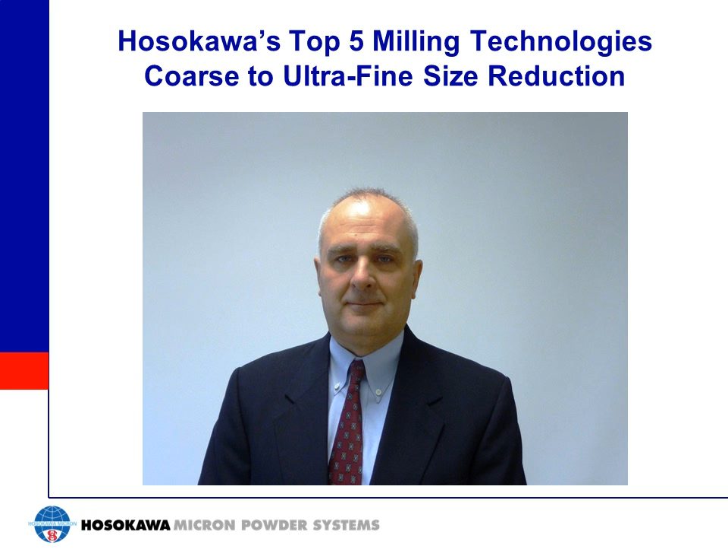The most important aspect of selecting a size reduction technology is to know some basic information about the product you want to process. It's important to note that based on product characteristics, only certain milling technologies may be suitable for a given application. Starting a project understanding these basic requirements will result in an economical and trouble-free milling system solution.

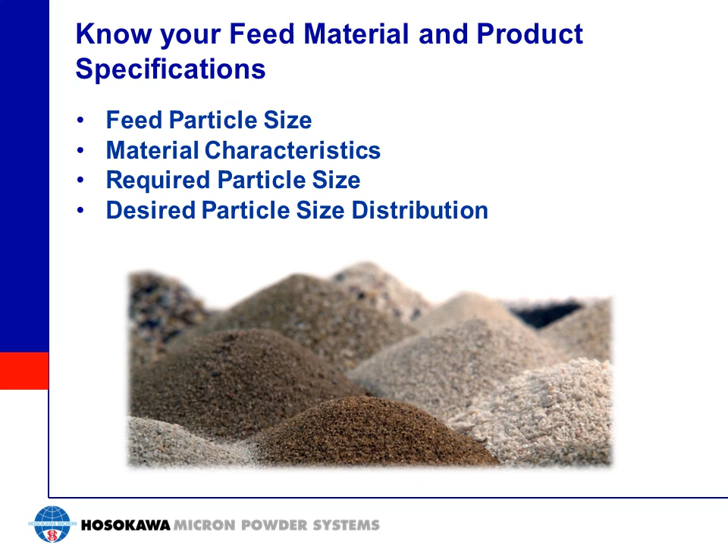Let's look at the effect of feed size on mill performance. Larger feed material means more residence time in the mill, and larger equipment will be required for a given production capacity. Feed size affects feeding methods and feeder selection. For example, air conveying a large high bulk density feed to a mill may not be possible.

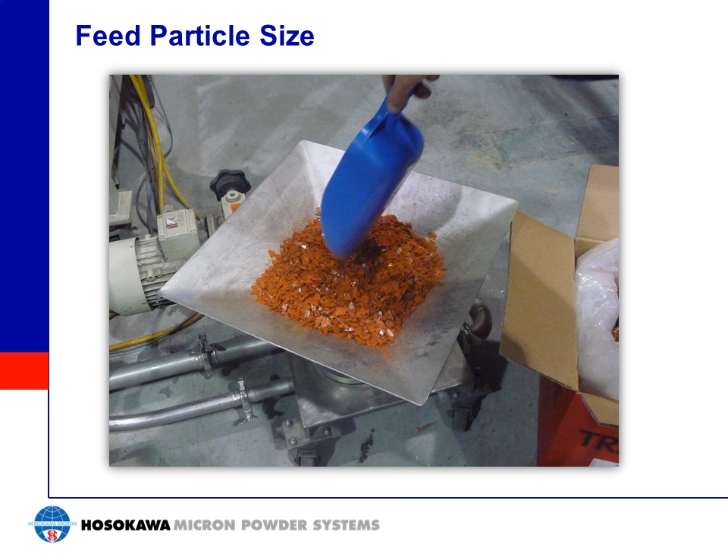Knowing the characteristics of your feed material is important. Bulk density affects flowability of the product. Feed rate and accuracy can be affected. Light density materials may flood past the feeder, affecting feeding accuracy and mill performance. Bulk density will also affect the sizing of hoppers and finished packaging. Light bulk density material will affect grinding efficiency, as lighter materials are more difficult to keep in the grinding zone of the mill.

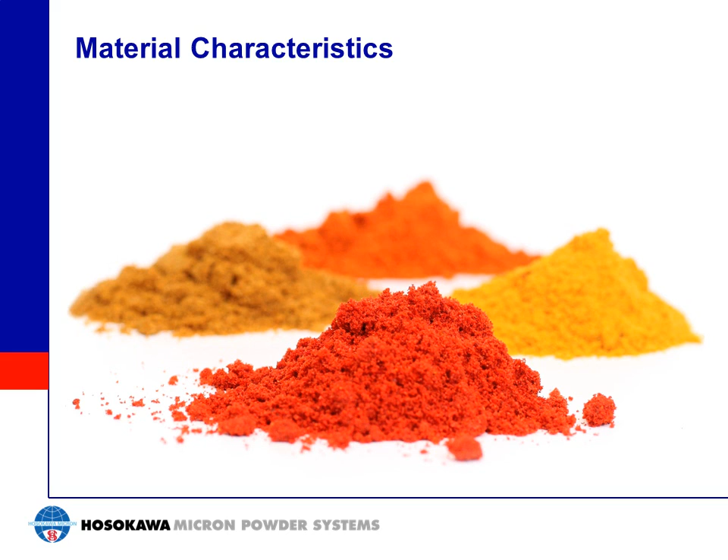Cohesive and sticky products may build up on mill internals and upset airflow and increase pressure drop across the mill. Systems may require the use of high velocity air to keep mill internals clean. Conditioned air for temperature and humidity control may also be required.

Low melt point materials are sensitive to high energy input. Heat-sensitive products may require cooling in order to efficiently process them. Hygroscopic materials absorb moisture, causing buildup and plugging, and may require dehumidified air for processing. On the other hand, products containing moisture may allow for high energy processing. The moisture in the product will absorb the heat of grinding, providing cooling in the process.

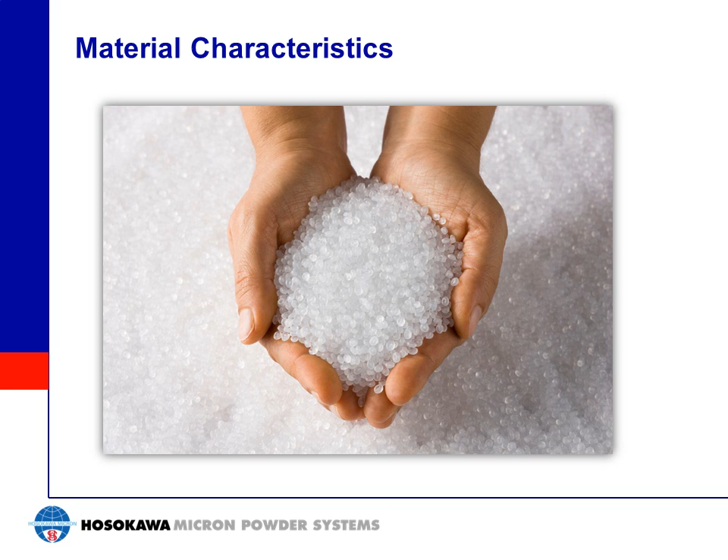High energy input can lead to the generation of too many fines when processing friable materials. Low energy processing may have to be employed when handling these types of materials. Impact force tends to produce sharp angular particles. Compression and shear forces tend to produce more rounded particles. High aspect ratio materials are destroyed by certain size reduction techniques. You can see that material characteristics play a very large role in machine selection and design.

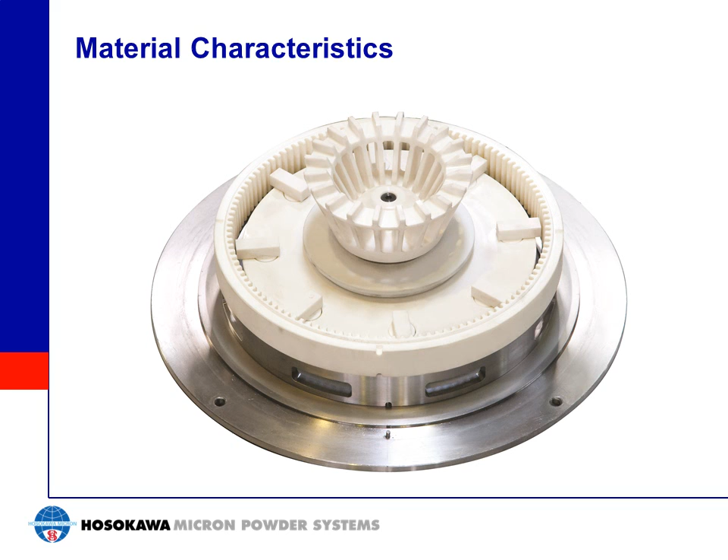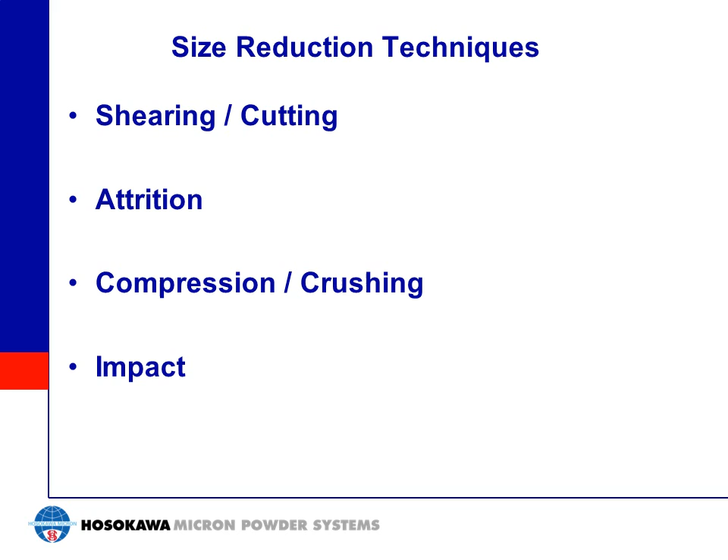There are 4 basic techniques utilized in size reduction equipment for the purpose of dry particle size reduction. They include particle size reduction through the processes of shearing, attrition, compression, and impact. In some cases, a combination of these may be found in any one mill type.

Milling using shear forces works when particles are stressed between 2 surfaces that are moving in opposite directions. An example would be the operation of a ball mill, where particles experience shear forces as they are stressed between the media, which is constantly in motion within the mill.

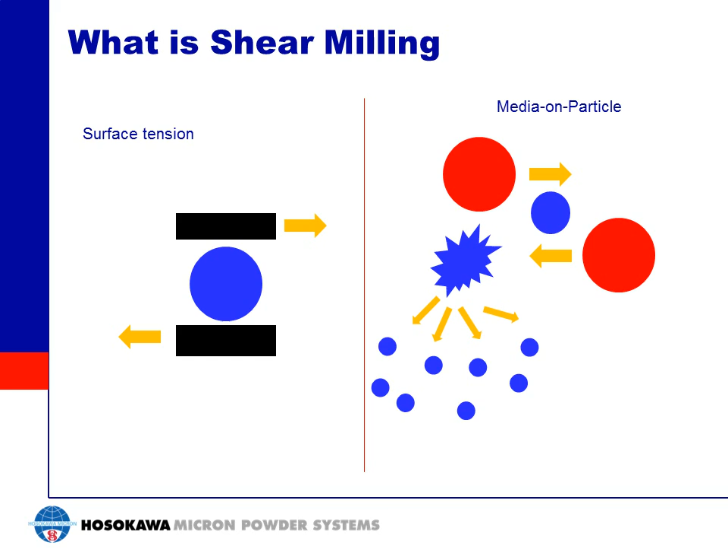Compression milling can be accomplished in 2 ways. The first would be the compression of a particle between 2 solid surfaces. An example would be the size reduction that takes place in roller mills. The second way would be the compression of a particle between grinding media, such as the way a horizontal ball mill functions. The principle of compression and shear forces is employed in many types of size reduction equipment. These principles are best used to produce materials with narrow particle size distributions with a limited generation of fine particles.

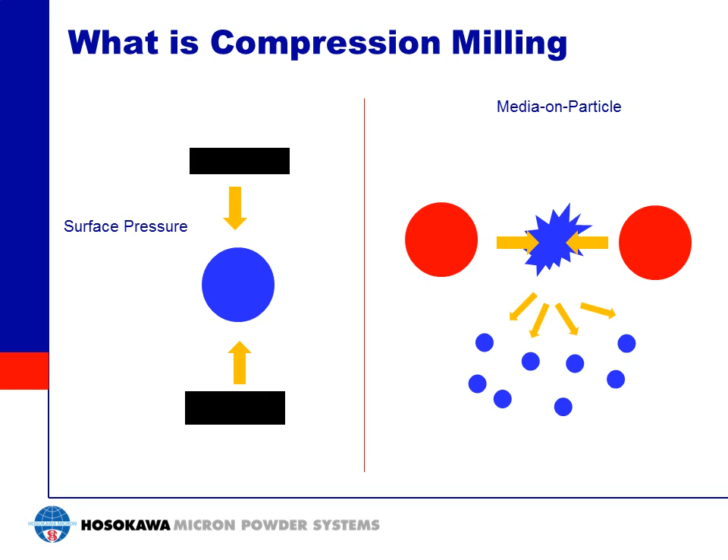Impact is defined as a solid object moving at high velocity coming into contact with a stationary particle.

Impact milling can be accomplished in two ways. The first is to use a moving hammer or impact element to strike and fracture a particle into smaller pieces, as shown on the left side of this slide. As an example, all hammer mills work this way.

The second way is to use a motive force to accelerate particles into each other for particle-on-particle impact and fracture. An example would be jet milling technology, where compressed gas provides the force needed to accelerate the particles to collide with each other.

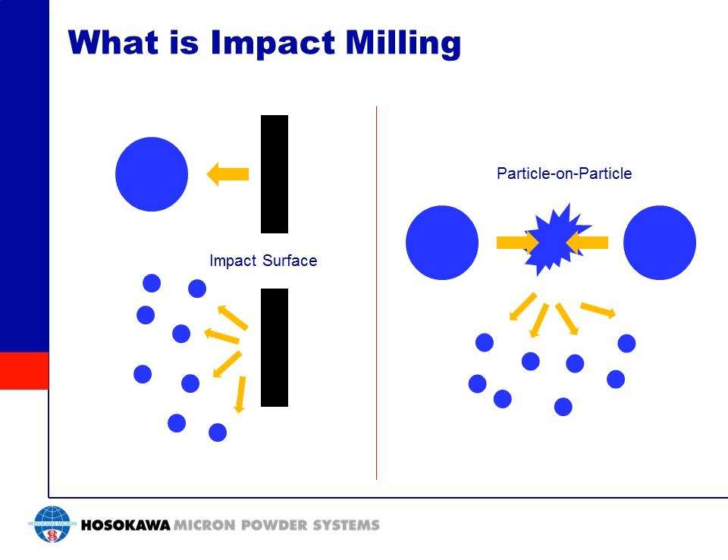Impact is used to achieve the highest fineness possible in these types of machines. Most hard, crystalline, and amorphous particles react well to impact for the purpose of size reduction.

I chose to discuss these 5 types of milling technologies as they cover more than 90% of size reduction applications in the major chemical, food, pharmaceutical, cosmetics, and minerals industries. Each of these technologies can be supplied for a variety of different applications. These mills are most always supplied as part of a complete size reduction system.

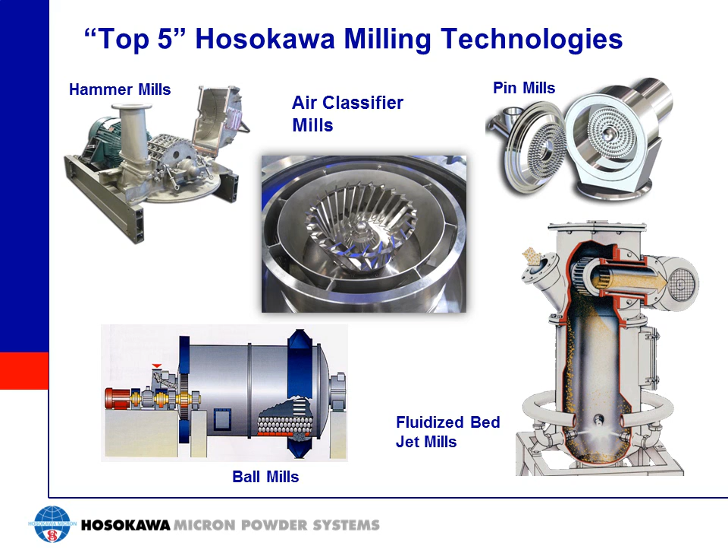We will start with the subject of hammer mills. Hosokawa manufactures the Mikro-Pulverizer hammer and screen mill and the Mikro UMP Universal Mill, a food and pharmaceutical grade milling system.

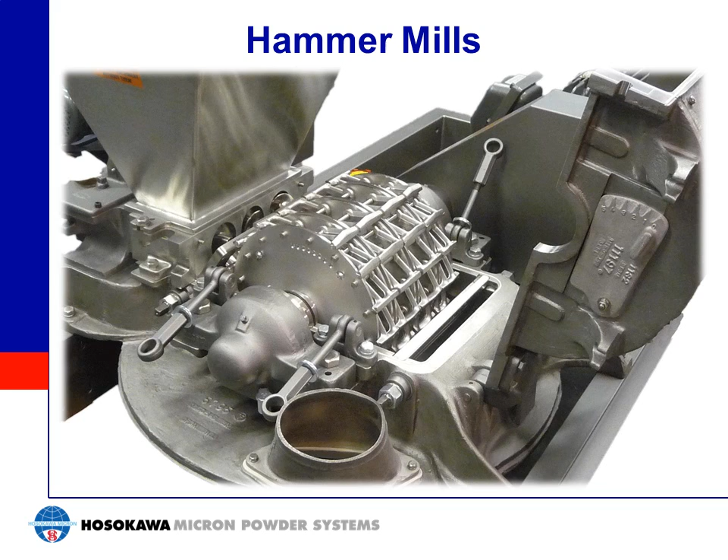The Mikro-Pulverizer can be used for pre-grinding, deagglomeration, and medium to fine size reduction. This type of hammer mill provides excellent top size control and particle size distribution control. These mills, provided with knife or bar hammers, can produce coarse and granular end products, but the mill is primarily used for finer grinding when the desired particle top size is in the range of 50 to 75 microns.

A wide range of particle size distributions with defined top sizes can be produced with the Mikro-Pulverizer. Rotor speed, screen configuration, and the type of grinding elements provide flexibility in producing many different end products.

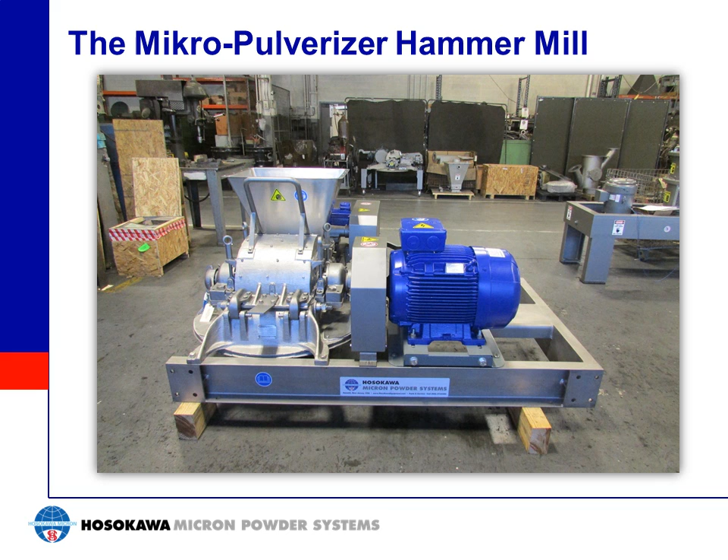This hammer mill design consists of a rotor assembly with hammers that rotate inside a cylindrical housing. The top of the housing contains a multiple deflector liner, which you can see better here in the color insert at the top of the slide.

Particles are accelerated into the liner by the impact force of the hammer. The impact breaks the particles into smaller pieces, and the liner slows their peripheral velocity and deflects them back into the hammer path for further size reduction.

The bottom portion of the housing contains a screen, as seen in the color insert at the bottom of the slide. The screen is used to control the size of the particles exiting the mill. Various screen types and hole sizes are used to change the final product size.

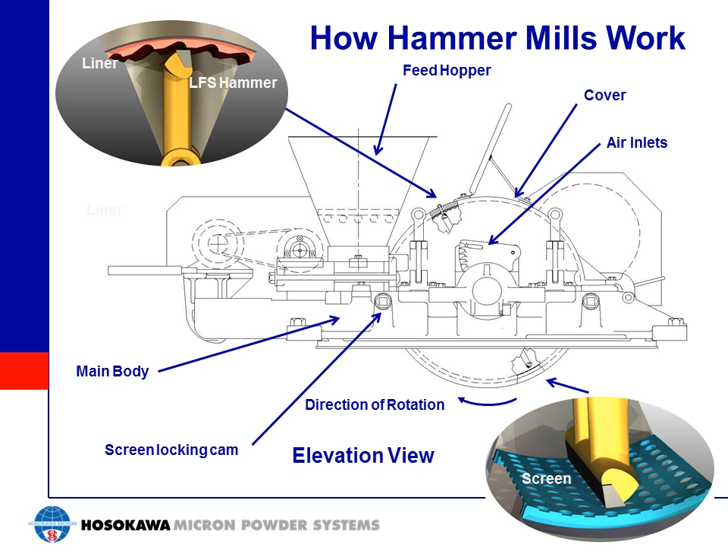Here you see the basic rotor assembly with impact hammers. At top rotor speed, the impact hammers travel at over 100 meters per second, or close to 20,000 feet per minute. As an example, a hammer in this type of mill traveling at top speed could cover the length of a football field in 1 second.

This high energy impact produces a finished product with a high degree of fine material. The incorporation of a screen allows the Mikro-Pulverizer to produce sharper particle size distributions with a defined top size.

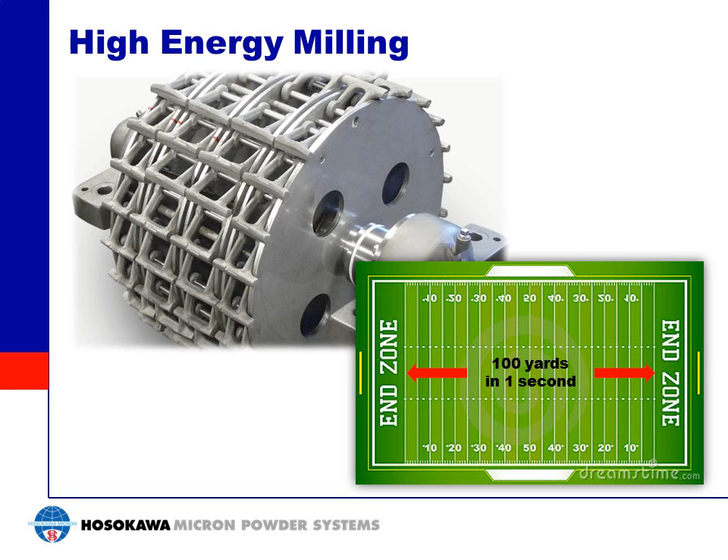The Mikro-Pulverizer product line consists of 8 model sizes from 1 to 350 horsepower. All models are customizable with a wide variety of components and materials of construction to meet many application requirements. These machines are economical to operate and can be incorporated into simple systems that are easy to operate and maintain.

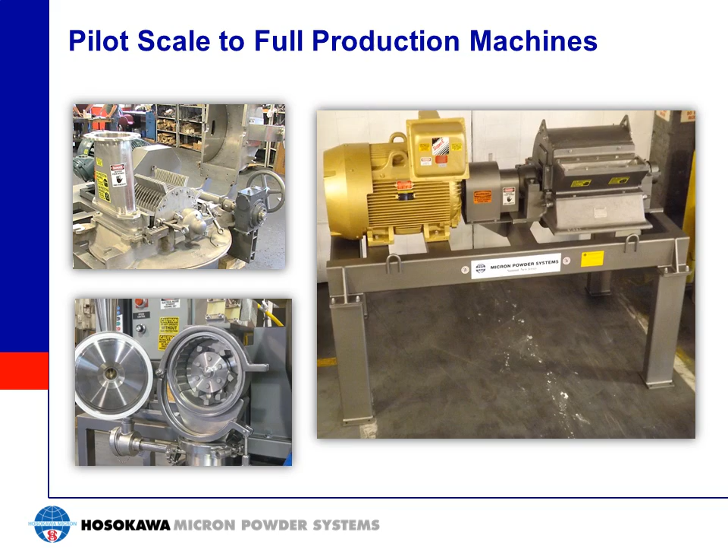Our Mikro UMP Universal Milling System is the next generation of the Mikro-Pulverizer. It is designed specifically for use in pharmaceutical, food, and fine chemical industries where ease of cleaning and sanitary designs are required. Most models are available with either of 4 different rotor options: hammers, pins, knives, or attrition discs. There are 5 sizes available, ranging from laboratory to production scale models.

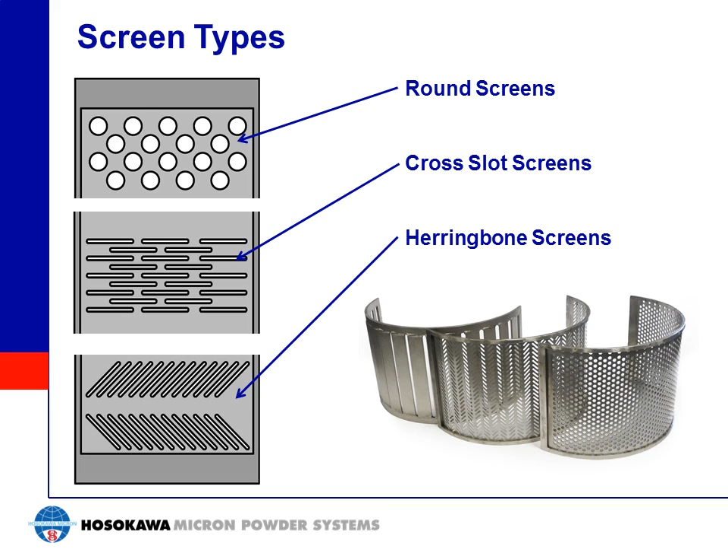Controlling particle size and particle size distribution can be accomplished in the Mikro-Pulverizer by employing a variety of different screen types and hammer designs. The sizes of the perforations and slots come in many dimensions. Round-hole screens produce the finest grinds, but herringbone and cross-slot screens are employed to process sticky or fibrous materials.

There are basically three types of hammer designs: the Stirrup or LFS hammer, the swing bar hammer, and the rigid bar hammer. The Stirrup hammer has the most surface area and is used at high speeds to produce the finest particle sizes. The swing bar hammer is used on materials that do not respond well to impact. Fibrous materials that need to be cut or shredded work well with these types of hammers.

The rigid bar hammer is used for granular and coarse size reduction applications, and for producing narrow particle size distributions when a minimal amount of fines generation is desired. All of these hammer types have wear-protected tipping added to prolong wear life.

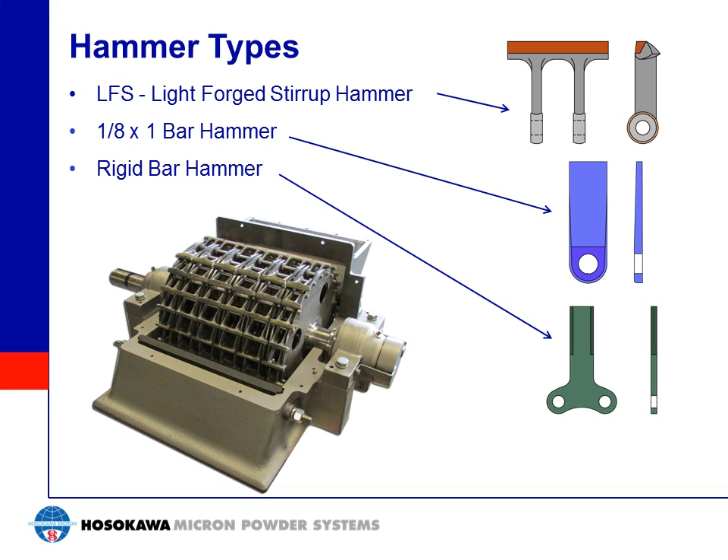As an example, the combination of higher rotor speeds, smaller screen openings, and maximum surface area of the grinding elements leads to the production of the finest end products. The utilization of lower rotor speeds, larger screen openings, and grinding elements with minimal surface area produce the coarsest end products. Variations of these operating parameters and alternate internal machine components allow for a wide application range for this type of mill.

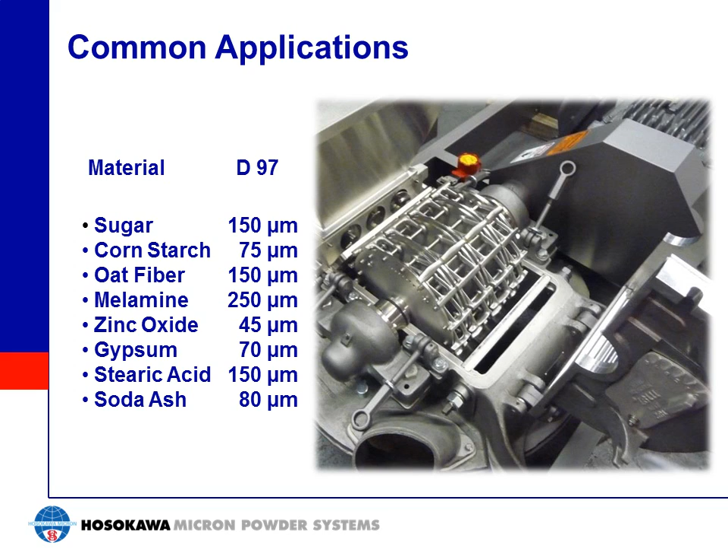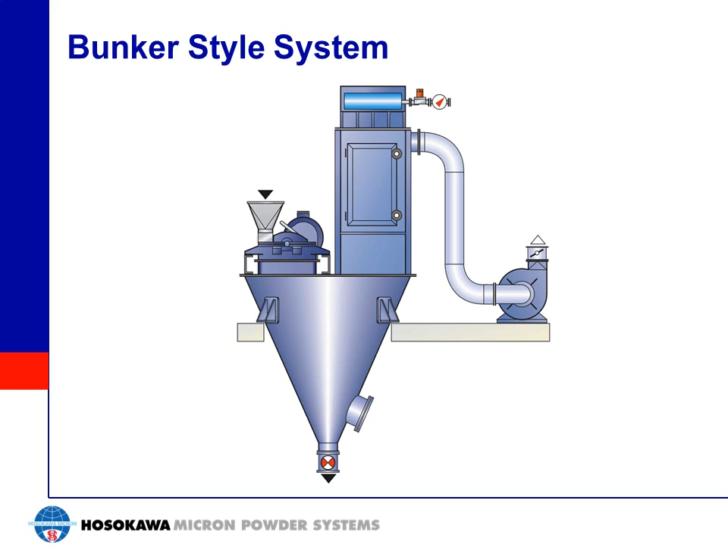Since hammer mills will generate airflow, the air generated during the milling process has to be vented from the machine. The most basic and compact Mikro-Pulverizer system operation is shown on this slide. The mill and product collector are mounted on a hopper. Material is processed in the mill and displaced air and product mixture flows to the product collector. Particles entrained in the airstream are collected in the filter and discharged back into the hopper below.

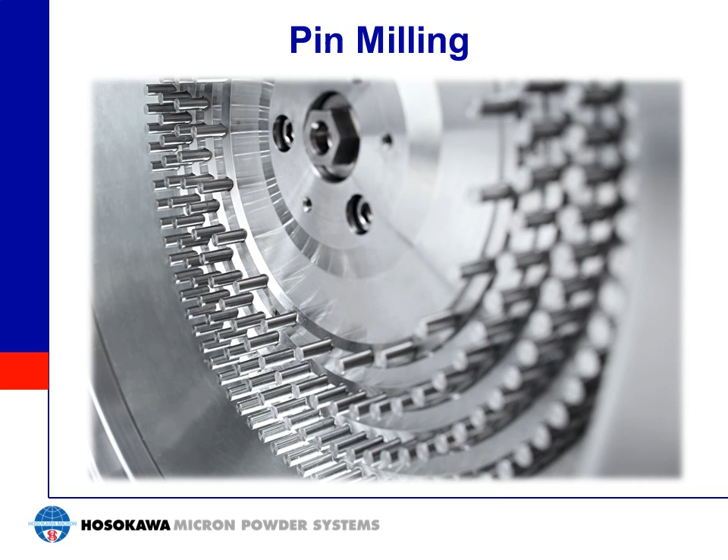The next topic will be size reduction using pin mills. Hosokawa manufactures both the Alpine UPZ and the Mikro UMP pin mill product line. These pin mills are used for a variety of applications where medium to fine size reduction is required, providing an end product with a low amount of fines and good flow properties. Materials that are sticky and tend to plug hammer mill screens work well in pin mills, as there is no screen that provides retention of the material within the mill.

Particle size in a pin mill is controlled by the variables of rotor speed, feed rate, and airflow. By utilizing a higher rotor speed than the Mikro-Pulverizer, the pin mill can produce even finer products.

Our most common pin mill design is the single rotating pin disc design with stationary door disc and narrow grinding chamber. Centrifugal forces generated by the rotating disc cause the material to radially pass through a labyrinth of pins aligned in circular rows. Material is reduced in size by impact as it passes through the rows of pins.

No screens are used in pin mills to control particle top size. The high speed of the pin disc generates the finer particles. Tip speeds in these pin mills can reach up to 150 meters per second. The overall particle size distribution generated in these pin mills is much wider than the hammer and screen mill due to the lack of a screen for top size control.

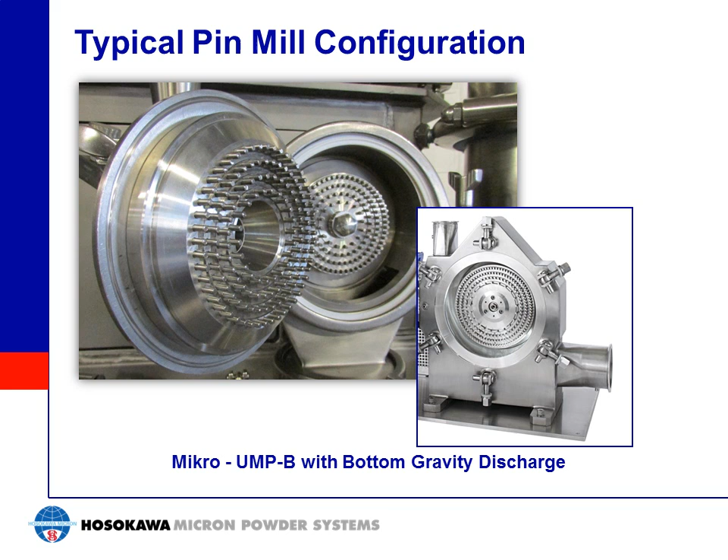Our pin mills can also be designed with counter-rotating discs. Due to the very high differential tip speeds in these mills of up to 200 meters per second, they can produce even finer grinds than the single rotating pin disc design.

For special applications, a wide chamber design is used to process sticky materials. The wide chamber helps to eliminate any material from accumulating within the mill.

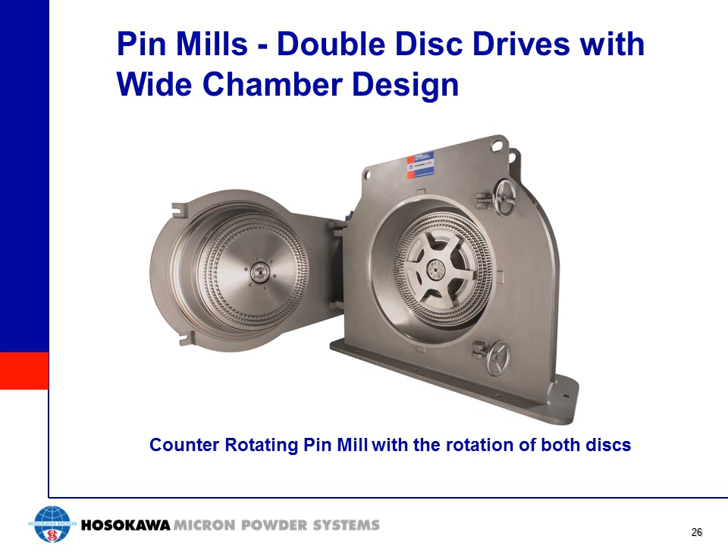With a pin mill, the particle size is controlled by three parameters: feed rate, rotor speed, and airflow. Increasing the feed rate will result in a coarser particle size, while reducing the feed rate will have the opposite effect. Increasing the rotor speed and impact force will generate a finer particle size, while reducing the speed will have the opposite effect. Increased airflow will produce a coarser product, while decreased airflow will produce a finer product.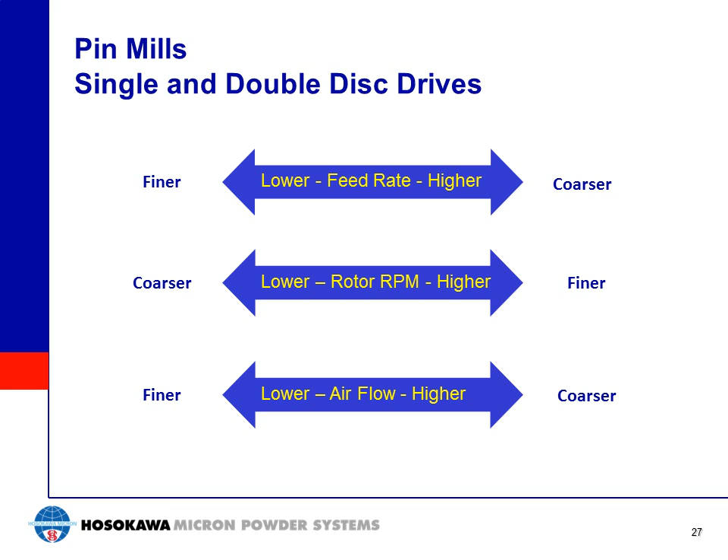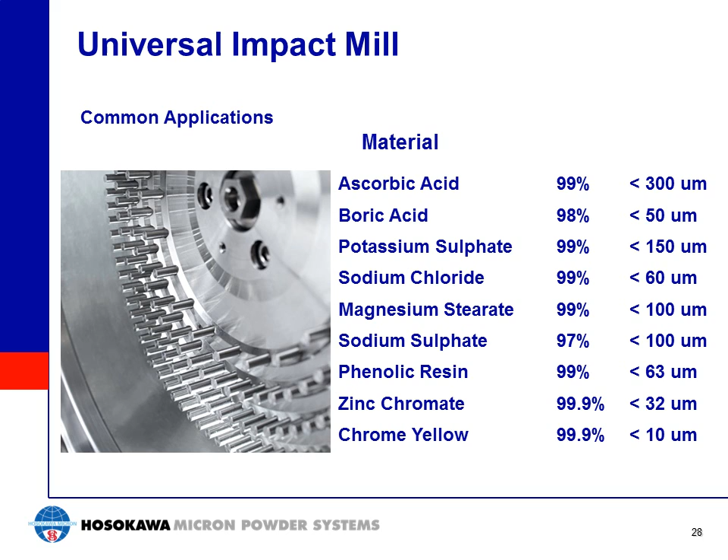For pin mills with a single rotating disc, this slide shows common results for a variety of fine chemicals. Here you can see that we can achieve particle sizes in the range of 300 microns down to less than 10 microns on a variety of fine materials.

Wide chamber pin mills are good for processing sticky materials. As an example, various spices with high oil content or fat content can be processed without the need for cooling. Under chilled or cryogenic processing, much finer particle sizes can be achieved.

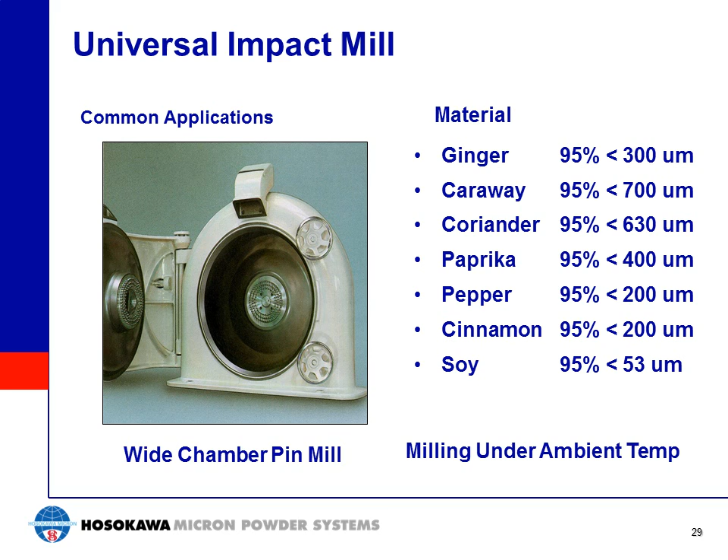Hosokawa manufactures a wide range of pin mills from the smallest 33 mm diameter unit up to a 1.4 meter diameter model. Units are available in all materials of construction and finishes. Design pressures of the units range from atmospheric to 10 bar overpressure.

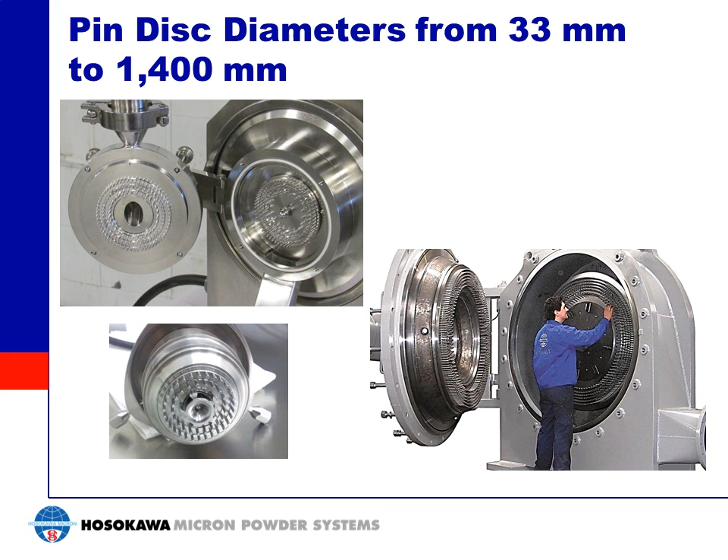Pin mill systems also require additional ancillary components to allow them to function properly and efficiently. Shown above is a gravity system. Depending on the air volume generated by the mill, the system can be used with or without induced air conveying as required.

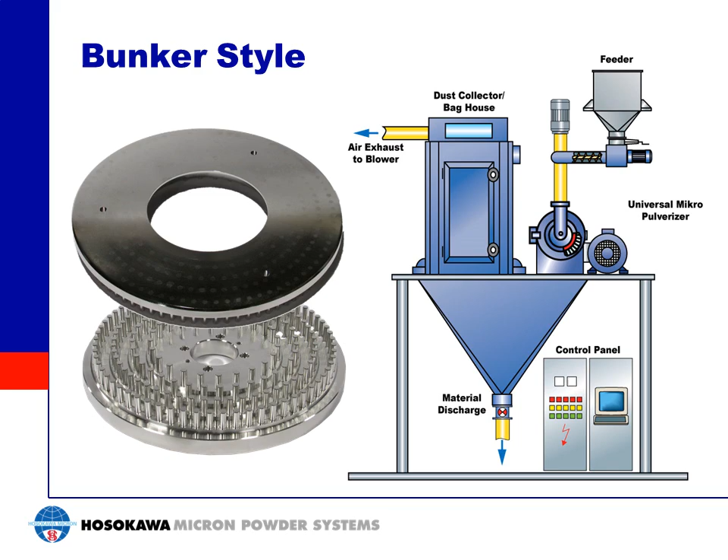This is a once-through negative pressure system and is widely used when continuous operation is desired. This basic system, with some additional ducting, a heat exchanger, and some additional instrumentation, can also be operated as a closed-loop system. Closed-loop systems are especially desirable when processing with an inert gas, as in the case of processing a material that may be a potential explosion hazard.

Closed-loop systems are also used when cooling of the processed gas is required, or when heat recovery for energy efficiency is desired.

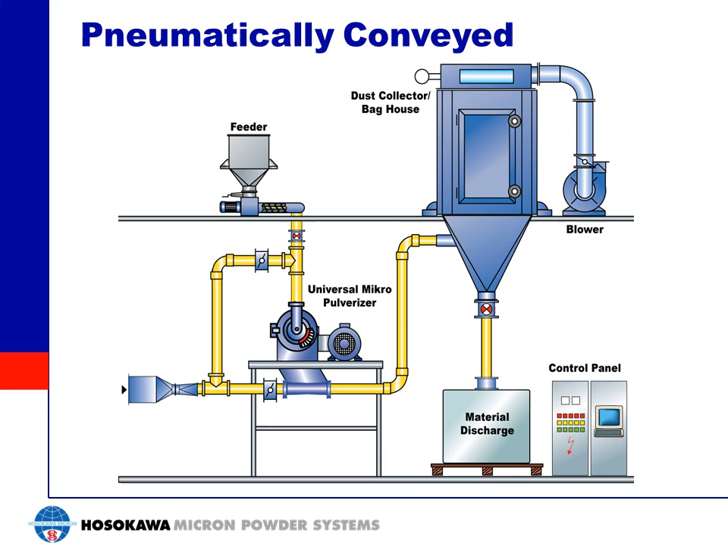Next, we'll look at the Mikro ACM air classifier mill, its design, its operation, and its application.

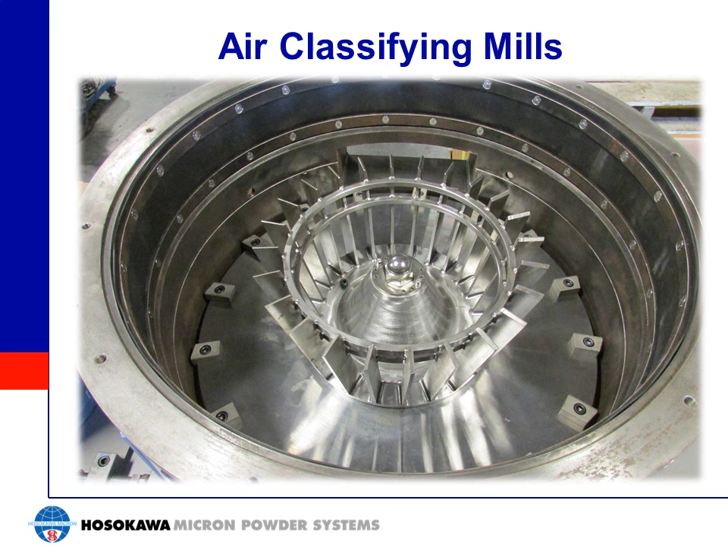Air classifier mill is a general term used for many types of impact mills that also incorporate dynamic air classifier technology as part of the mill design. The Mikro ACM was developed by Hosokawa to address the need for finer materials and to provide the user with much more flexibility and control when there was a requirement for producing different products.

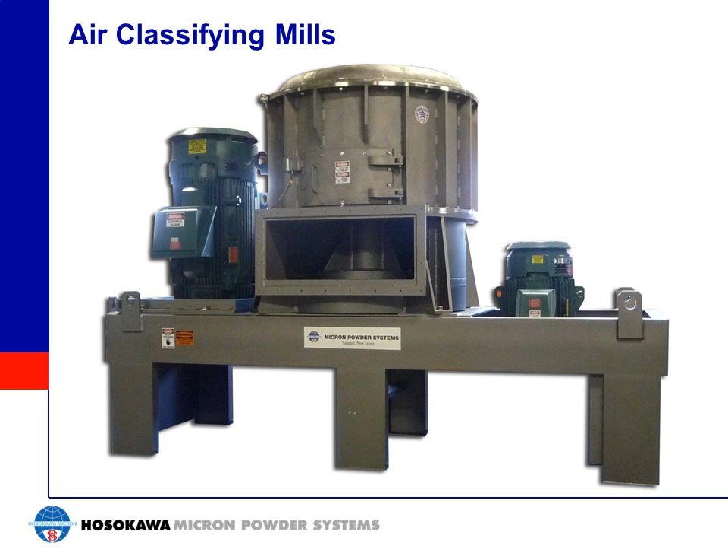Air classifying mills are the most widely used milling technology in the powder processing industry today for the general size reduction of fine chemicals and food products. The basic advantage of these mills is that they grind and classify in one step.

In the air classifier mill, particle size is easily controlled by adjusting the speed of an internal classifier wheel. Here you can see the classifier wheel mounted in the mill housing. You can also see the shroud and baffle assembly that separates the classification zone within the mill from the grinding zone.

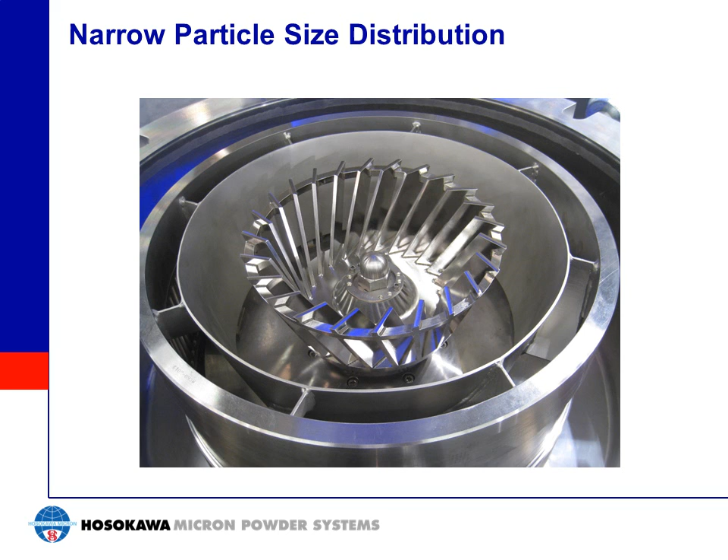In this cross-section of the Mikro ACM, you can see the path of material and air within the mill. The air path is shown in red, and the material path is shown in blue. The main principle of this mill type is to use air to convey material to the mill, air to classify the product into fine and coarse fractions, and air to convey the fines out of the mill. Coarse material is then returned to the grinding chamber for further size reduction. This process is repeated on a continuous basis.

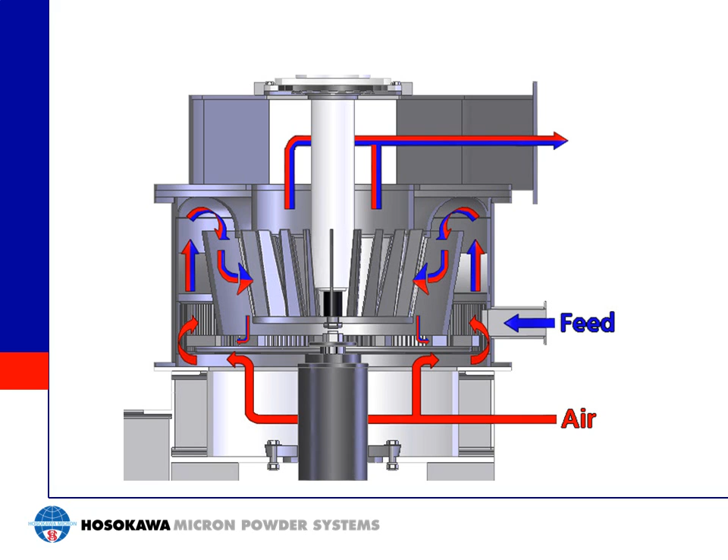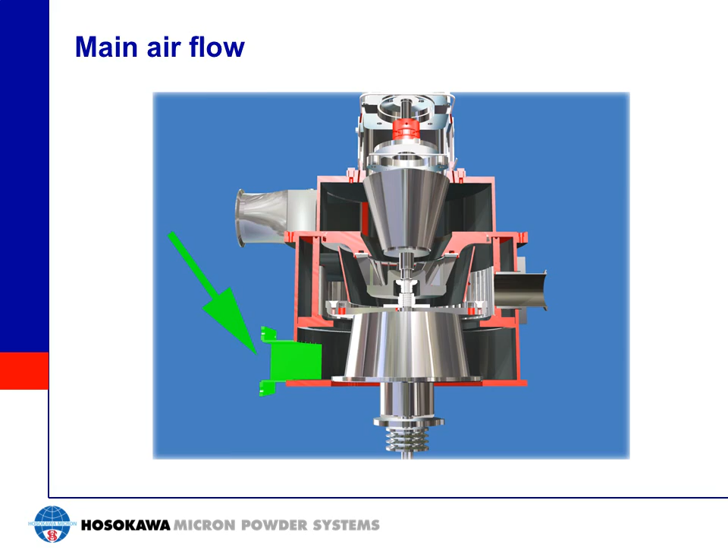Let's look in more detail how air and material flows through the mill. The main airflow is introduced to the mill from underneath the main rotor disc as shown here. Air flows from the mill inlet and enters the grinding chamber from underneath the main rotor via an elutriation ring that evenly distributes the air around the circumference of the impact rotor.

Material is introduced radially into the grinding zone at the hammer tip, where it is impacted by rotating hammers as shown here.

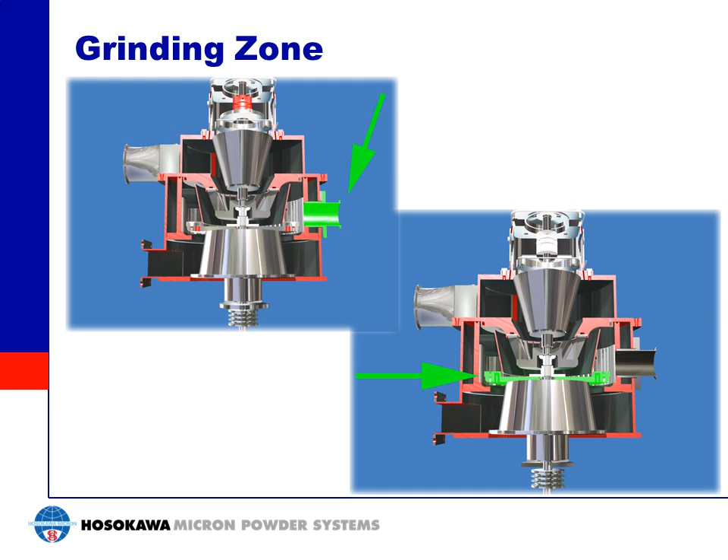Processed material is then carried by the airstream over the shroud and baffle to the classification zone shown here on the left. Correctly sized material passes through the classifier and exits the mill through the upper volute assembly as shown on the right.

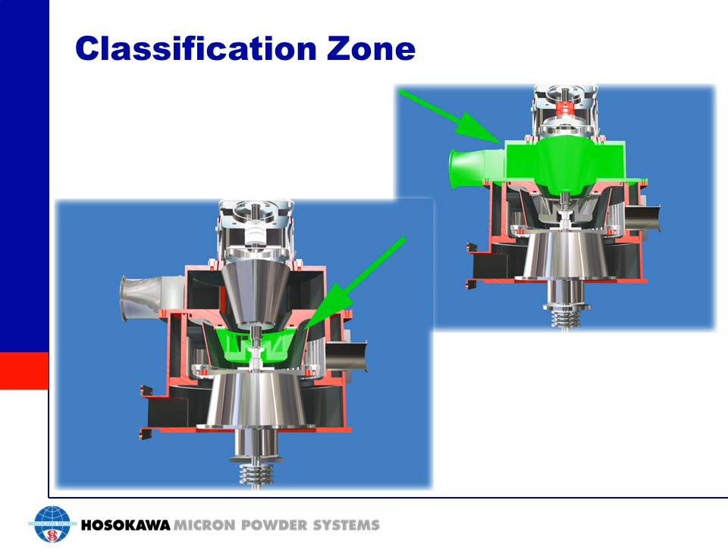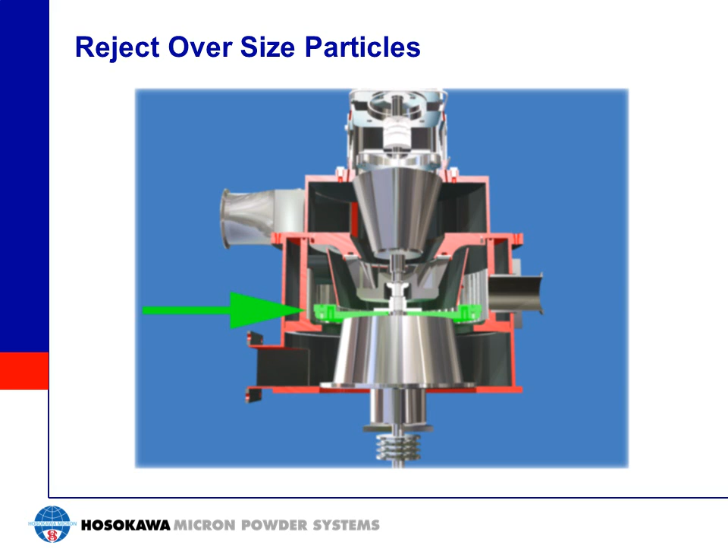Oversized material is rejected by the classifier and is carried back by the air to the grinding zone by passing underneath the bottom of the shroud.

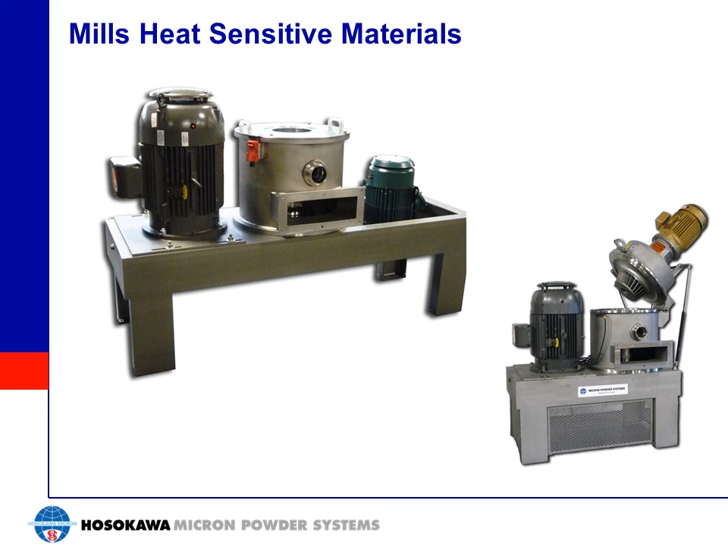Air classifier mills can be used for a variety of applications. Due to the requirement for air for processing, heat-sensitive materials can be easily processed. The makeup air to the mill can also be conditioned so that humidity and temperature can be controlled when processing hygroscopic or heat-sensitive materials. Heat can also be added to provide drying when low levels of moisture need to be removed from the product.

A variety of designs and sizes are available. Small units of 1 horsepower are capable of handling a few kilograms of material. Sanitary designs are available for handling pharmaceutical and food-grade products and when special cleaning and sanitary requirements need to be addressed. Large capacity mills of 600 horsepower and more are designed with special wear-protected internal components.

These mills are available for minerals-related applications or materials that are somewhat abrasive in nature. For handling materials that present an explosion potential, these mills can be designed to handle an overpressure of 150 psi.

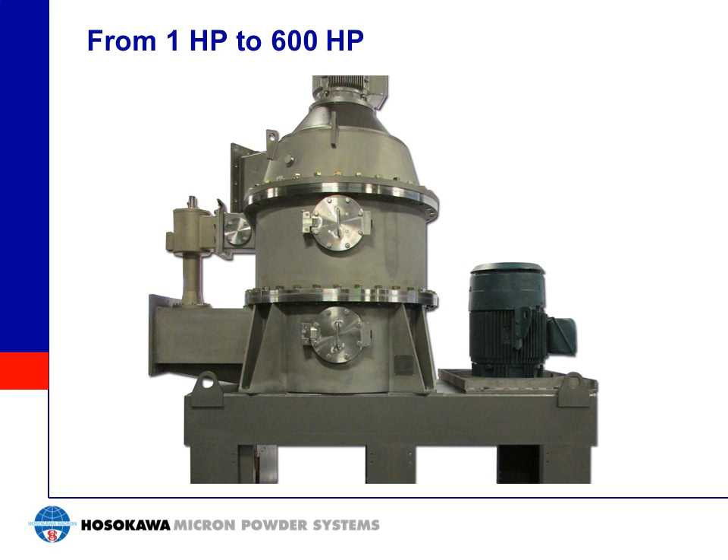While the classifier speed has a large effect on particle size, airflow can also be adjusted to change particle size. While the primary purpose of the classifier is to control particle top size, the mill internal components can also be changed to adjust the particle size distribution.

As an example, the standard liner configuration supplied with these mill types is the multiple deflector liner. This liner type has vertical grooves designed into the circumference of the liner. This type of liner serves the purpose of slowing the circumferential speed of the particles and deflecting them back into the path of the rotating hammer, maximizing the impact force of the particle.

The liner type can also be changed to reduce the generation of fines or to make an overall coarser size distribution. The use of smooth liners in the grinding chamber will decrease the impact force of the hammer to the particle. The impact hammer design will also affect the impact force and thus affect the end product size.

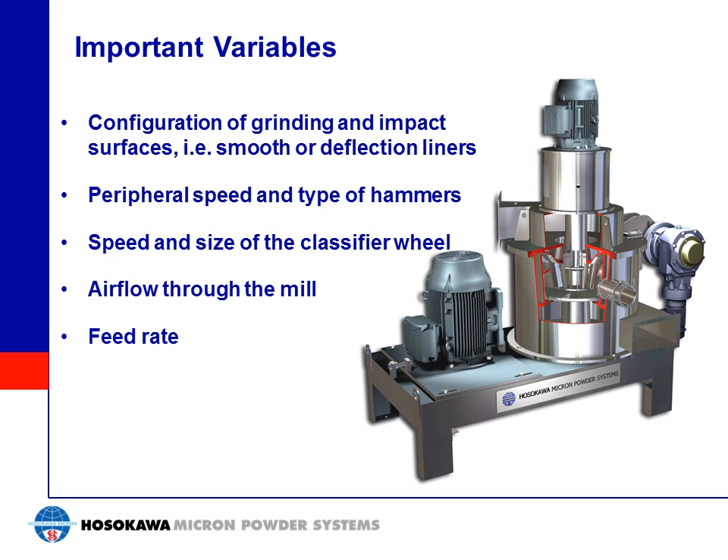An alternate type of impact hammer is the pin. Use of a pin rotor reduces the impact force, providing a coarser grind and minimizing the generation of fines. The rotor speed can also be reduced to minimize the impact force and to reduce the generation of fine material.

Adjustment of airflow and classifier speed allows for the attainment of many different particle sizes. Here are examples of particle sizes that can be achieved with the ACM on a variety of different materials.

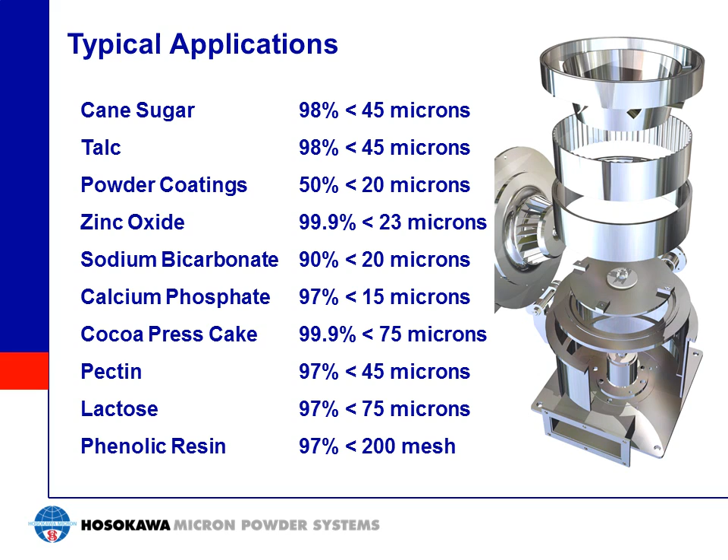Here you see a coaxial ACM design with a vertical outlet conveying milled material directly to a process receiver. The main air supply to the mill is split into 2 lines to allow for the pneumatic conveying of the feed material to the mill feed inlet.

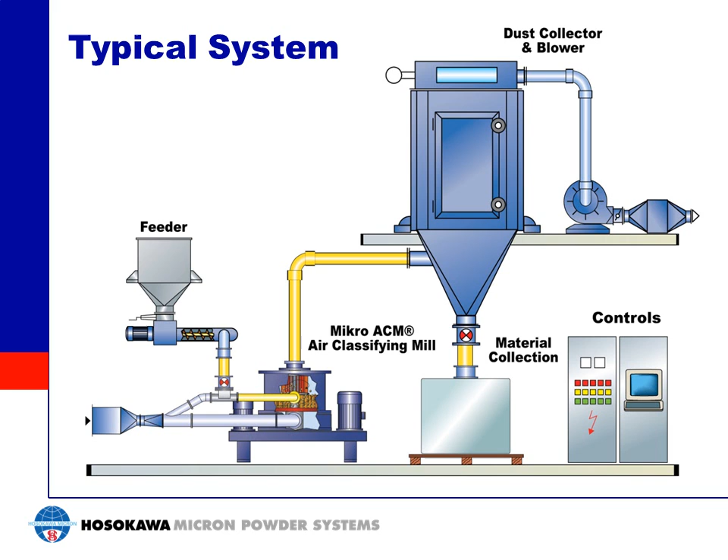In this system, a volumetric screw feeder is used to gravity discharge feed material into the pneumatic conveying line to the mill at a specific rate in order to utilize the full horsepower of the impact rotor.

Here we've added an inline classifier for the purpose of making both a top and bottom cut in one pass. Here the mill defines the product top size or coarse end of the particle size distribution, and the inline classifier removes the fines fraction, producing a very narrow particle size distribution.

This system is also designed to handle materials which present a potential explosion hazard. The valves shown here in red at the air inlet and discharge of the system provide isolation and containment of the overpressure and exhaust in the event of an explosion within the system. The valves will close under flow and pressure and will contain the explosion.

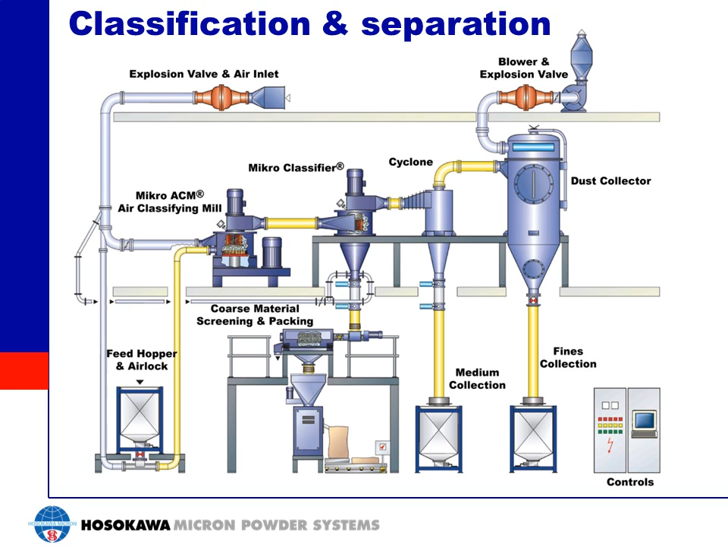Number 4 on our list is the Alpine AFG Fluidized Bed Jet Mill.

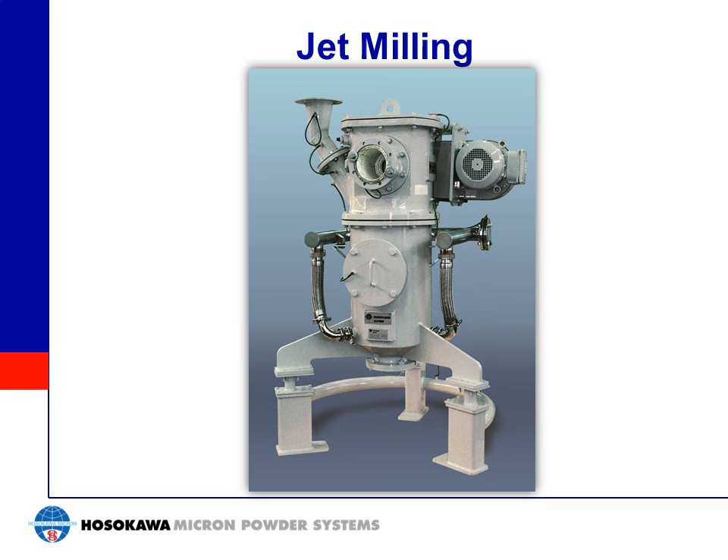Moving on to the requirement for the production of finer materials, we come to the discussion of the Alpine AFG Jet Mill. This fluidized bed jet mill uses particle-to-particle impact as the mechanism for size reduction. High-pressure compressed gas is used to accelerate the particles to a central focal point within the bed of material where impact and size reduction take place.

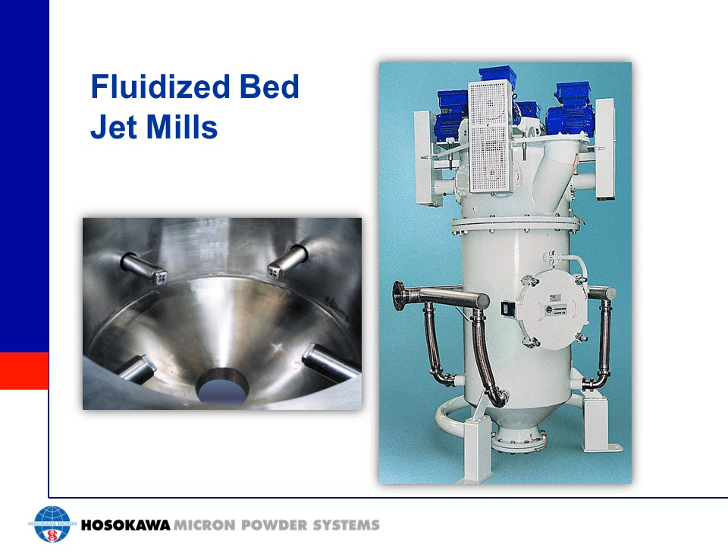These types of jet mills also use dynamic air classifiers to control particle top size. The AFG jet mill design incorporates a grinding zone as shown here at the bottom of the mill. The classification zone is located in the top section of the mill. Feed material is introduced to the mill through a top gravity feed inlet as shown here.

These mills work by accelerating gas through a nozzle directed to a central focal point. Multiple nozzles are used to generate a grinding zone at the center of the mill. The material bed height in these mills will completely cover the nozzles during operation. Only gas and not product passes through the nozzles.

The high velocity gas entrains the material in the bed, and the combined gas material mixture is directed to the central grinding zone. Particle-to-particle collision is responsible for size reduction. Fine material is carried by the upward flow of air to the classifier wheel, where material ground fine enough exits the mill and oversized material returns by gravity to the bed.

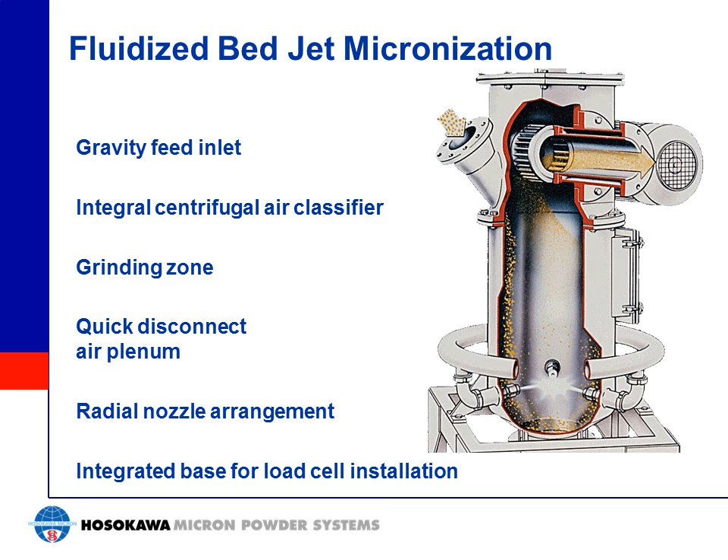All AFG mill designs incorporate a radial nozzle arrangement, with the number of nozzles used varying with mill size. In general, the larger the mill, the higher the quantity of nozzles utilized in order to introduce the correct volume of air required for grinding. Different types of nozzles are also available depending upon the requirement of the application.

Designs are available for handling materials that are potential explosion hazards. Due to the high volumes of gas utilized in processing, in most cases it is not economical to process materials using inert gas. For materials that are potential explosion hazards, the mills can be designed for high overpressures, effectively containing any explosion that might occur.

For the processing of extremely abrasive materials, these mills can be lined with ceramics or polyurethane. New technology allows for the high wear components, particularly the classifier, to be made in silicon carbide or a completely cast aluminum oxide wheel, providing thousands of hours of service life when processing abrasive materials.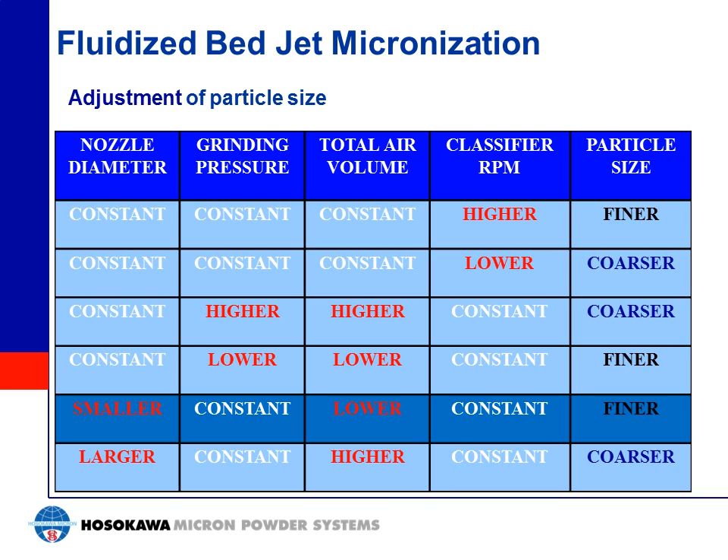The AFG jet mill can handle a wide application range. Due to its operating principle, it can handle extremely abrasive materials, as particles are impacted against each other and not against the internal components of the mill.

Very heat-sensitive materials can also be processed. Due to the rapid cooling of the grinding air as it expands in the grinding chamber, the mill operates at reduced temperatures. Soft and sticky material can be processed as buildup is eliminated due to the particle-to-particle impact and not particle-to-hammer or mill wall impact.

Materials requiring a high degree of brightness or purity can be processed in these mills, as most contact with ferrous components is eliminated, or ceramic components can be used to minimize ferrous contamination altogether.

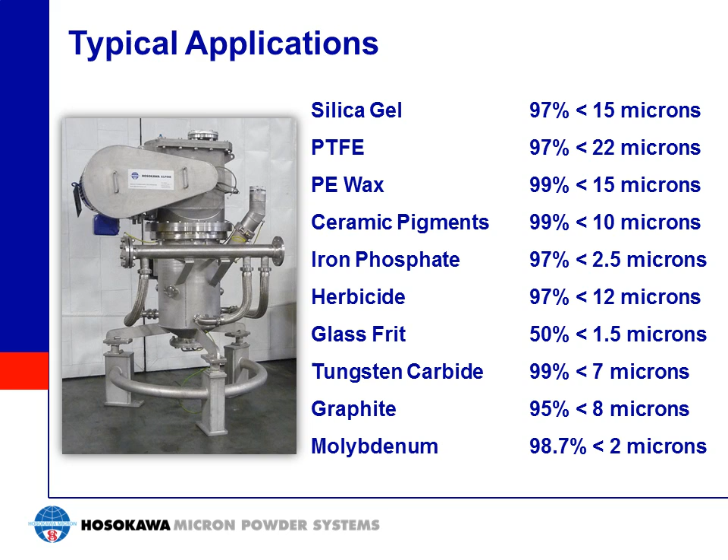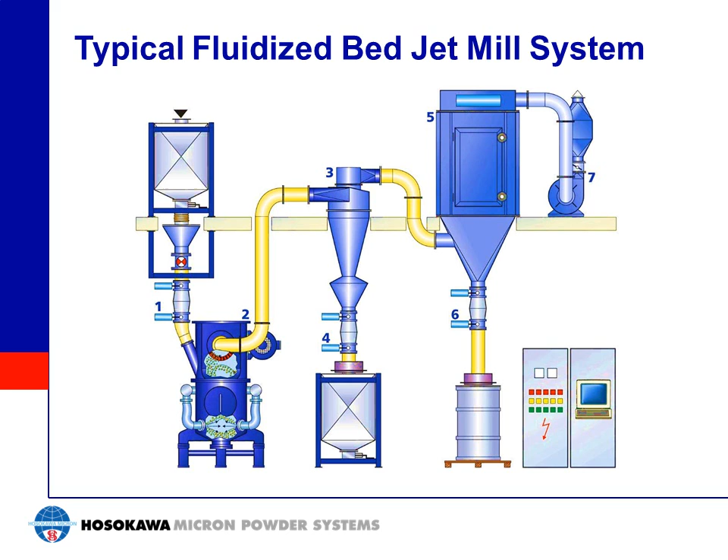Our last subject is the Alpine Super Orion ball mill. Over time, our superfine ball mill and classifying systems have been improved and are now capable of achieving much finer products. In the past, a particle size with a D97 of 10 microns was only possible. We can now achieve products with particle sizes down to a D97 of less than 3.2 microns, with a D50 in the range of 1.5 microns.

This improved performance is made possible by the optimization of all ball mill system parameters, including the incorporation of high-performance classifiers, the use of improved control systems, and the use of grinding aids.

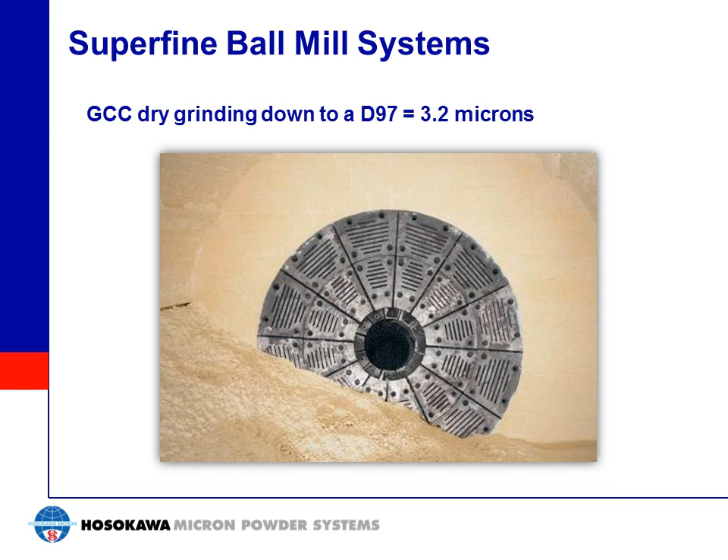There are quite a number of processing parameters which influence the performance and efficiency of a ball mill classifying system. Let's look at them briefly. Ball mill speed can be varied by use of a frequency converter to optimize mill performance. The length to diameter ratio of the drum: a longer drum will lead to a product with a higher fines content.

Selection of grinding media. Some options include silpebs or balls in steel or ceramic. As an example, silpebs have a higher bulk density and provide for more efficient grinding in some cases. Sizing of the grinding media: the proper sizing of balls or silpebs depends upon the end product fineness and also the feed size.

Selection of the mill lining. For soft minerals, usually steel linings are used, sometimes with a high chromium content option, which reduces material discoloration. In some cases, a ceramic lining is used if the highest whiteness or brightness is needed or any iron contamination must be eliminated. The mill discharge system can be air-swept, overflow, or slot wall design.

Air-swept mills are mainly used for coarse materials and are not suitable for fine grinding as too much coarse powder is carried out of the mill by the airflow. A slot wall is the best option, as very fine grinding media can be used, which is easily retained within the mill.

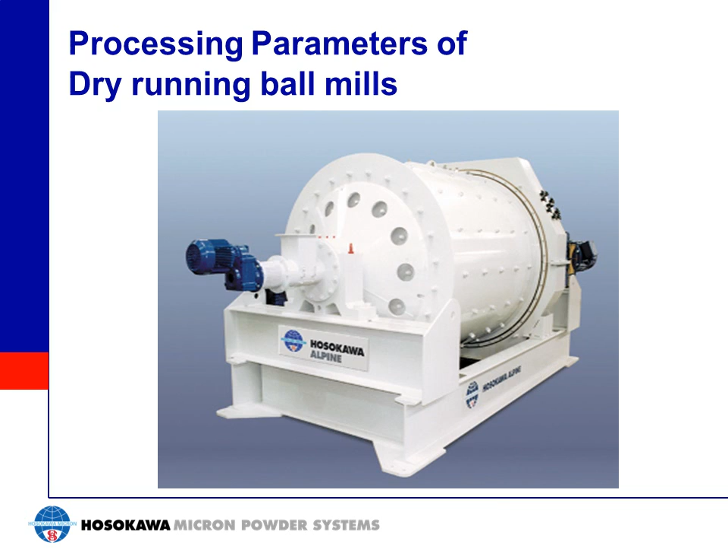On top you see a single chamber ball mill with peripheral outlet slots, which can be used for standard and ultrafine materials with a D97 of between 15 to 100 microns. On the right are shown some examples of grinding media, silpebs and balls made from steel or aluminum oxide.

The illustrations on the left show the flow patterns of the media within the mill. Figure A shows a cascade motion where the media is mainly rolling and we generate shear forces for grinding. When you increase the speed of the mill as shown in Figure B, a cataract motion is generated.

The ideal condition is to operate at the transition point between these two flow patterns in order to utilize both effects. This condition is reached at about 60 to 80% of the critical speed of the mill, resulting in the flow pattern in Figure C, where the centrifugal force is high enough to prevent the media from completely falling back down onto the material bed.

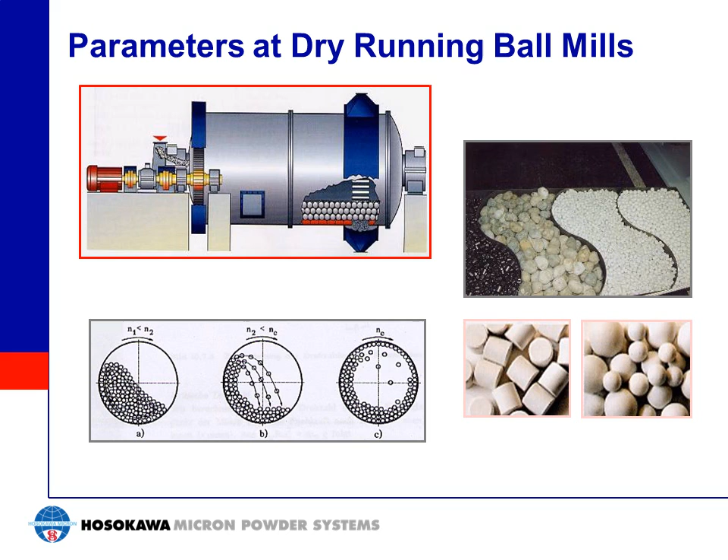A high-performance classifier in the system circuit is a requirement for producing these superfine products. These classifiers are capable of achieving the finest cut points, very sharp top cuts, excellent fine yields, and the highest possible capacities with excellent wear protection.

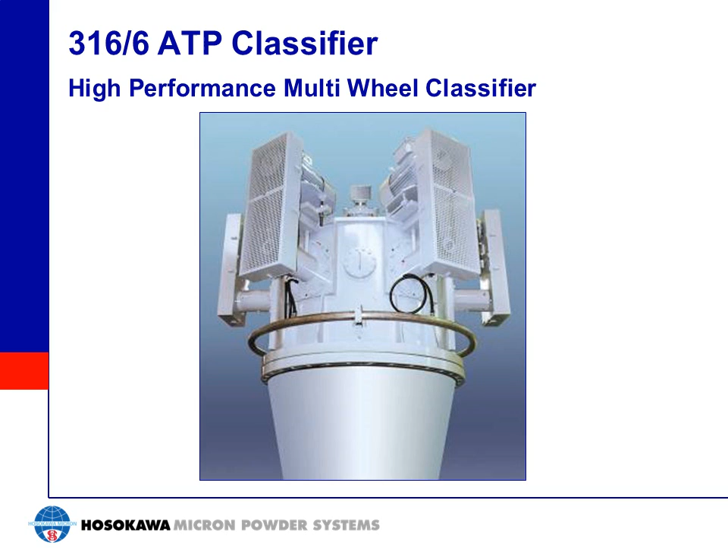The Alpine Super Orion ball mill in particular is used for processing industrial minerals. What are industrial minerals and fillers? Industrial minerals are geological materials which are mined for their commercial value. They are used either in their natural state or after some beneficiation.

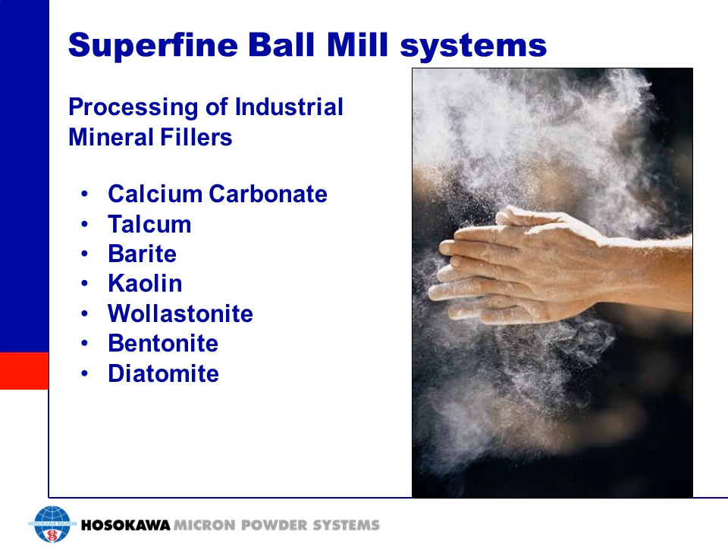Industrial mineral fillers are a variety of processed industrial minerals that may be irregular, fibrous, or platy in shape, and which are typically used in large volumes in paper, plastic, paint, and rubber products.

Standard products are in the range of 20 to 100 microns, which is relatively coarse when considering the capabilities of these ball mill systems. The requirement now is generally for finer grades of materials, which we define as ultrafine products, in the range of 5 to 20 microns.

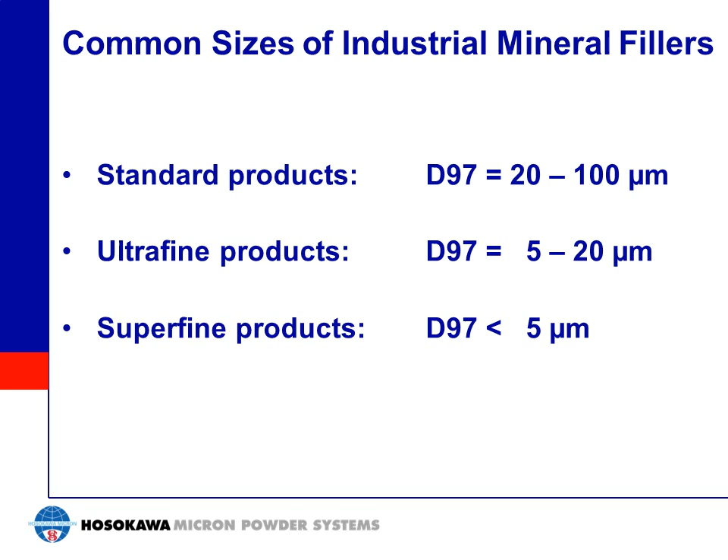Even finer grades of materials are now required, and we define these as superfine products with a particle size of less than 5 microns.

Super Orion ball mill systems are also used to process hard minerals. Because of the hardness of the material, a higher specific grinding energy per ton of material is required to achieve the same particle size as a soft mineral. Also, wear on the system components is much more severe and requires the use of affordable, long-lasting, replaceable components.

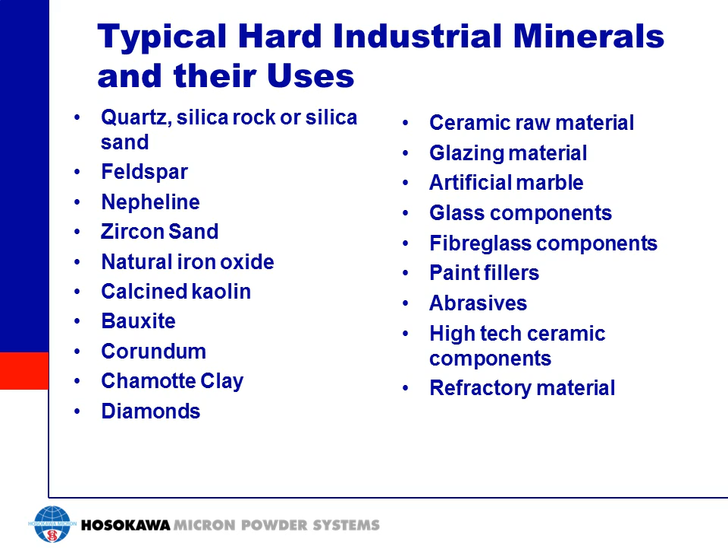Here we show examples of typical hard minerals and their uses. As our standard of living continues to rise and all related products become more advanced, high-quality standards for ceramic tiles, sanitary ware, porcelain, and special glass are required. The requirement for these mineral powders becomes more stringent in terms of top size, particle size distribution, and purity.

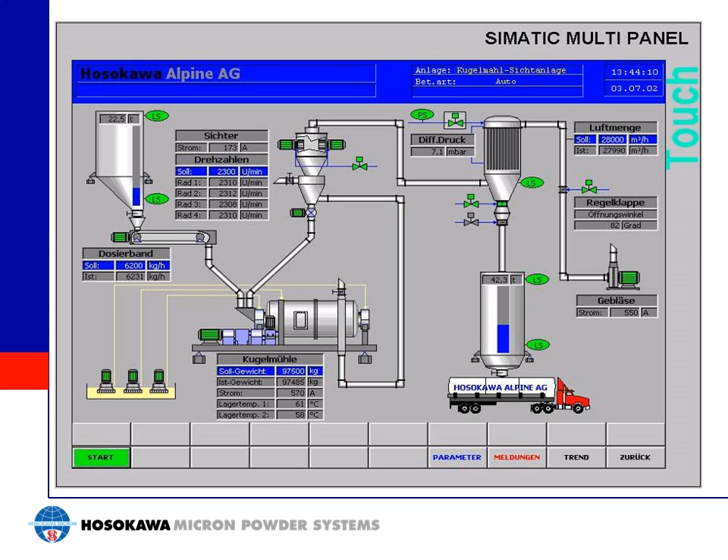The classifying air volume is measured and kept constant by use of a thermal mass flow meter and control device in order to assure consistent product quality.

This flow diagram shows a ball mill with a 450 kilowatt drive and a 500 ATP multi-wheel classifier. At a D97 of 10 microns, this system can produce 5 tons of material an hour. This system can also produce a finished product with a D97 of 3 microns at a capacity of 1.2 tons per hour. This demonstrates that superfine grinding on ball mills is possible.

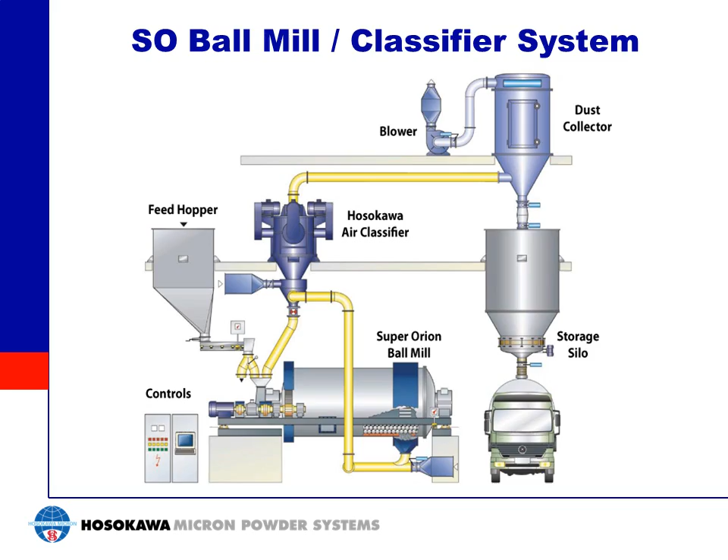There are hundreds of size reduction technologies available from many suppliers around the world. Hosokawa manufactures many different milling systems. Some are multifunctional and can process a wide variety of materials like the Mikro-Pulverizer hammer and screen mill. Others are more specialized, like the Mikro-Atomizer for PVC or the Mikro ACM for carbon black.

With all these options, we felt this presentation would be helpful to learn a little about some of the milling systems we produce that address the widest range of materials and the widest range of particle size and capacity.